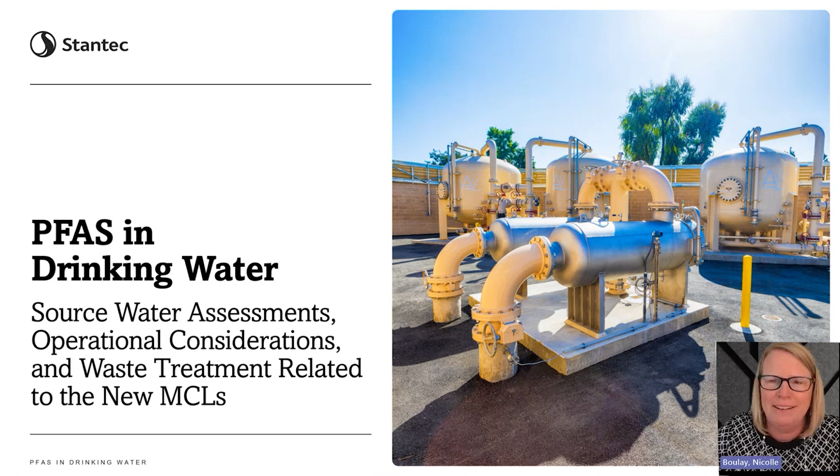So our agenda today is here. I'm going to give a few introductions of our speakers and also a very brief overview of the regulations. I know many of you are familiar with them. Joe Jacangelo is going to talk about source water assessments. We're going to have Tyler talk about operational considerations for PFAS project implementation. And then finally, Liz is going to finish up talking about PFAS treatment residuals management. And then we're going to have about 30 minutes, hopefully, for Q&A. So please go ahead and post those questions as we discuss. Next slide.

Okay, so here are our speakers. I mentioned myself, I'm Nicolle Boulay. I'm our water treatment sector leader. I work out of our Fairfax, Virginia office, and I have a background in water treatment design and construction. Dr. Joe Jacangelo is here, and he's a vice president with Stantec and also our director of research. He works out of our Washington, DC office, and he's worked on multiple PFAS-related projects around the country. Joe also leads our partnership with Johns Hopkins University.

Tyler Hadacek is in our Austin, Texas office, where he's a process engineer. And similar to Joe, he has worked on multiple PFAS-related projects. And recently, he's worked on some ion exchange treatment facilities for Orange County, California. And then Liz Garvey is a process engineer in our Burlington, Massachusetts office. And she has really taken it upon herself to become our company's resource on PFAS and residuals and other waste products.

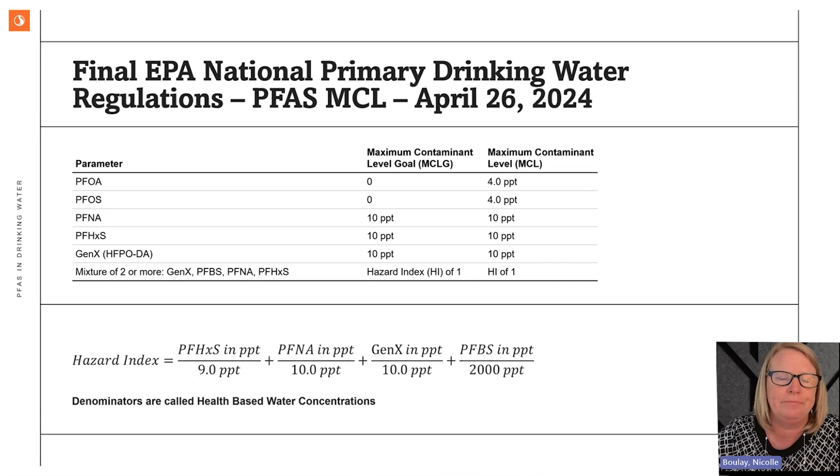So just a couple of key compliance activities that come out of the recently published regulation. All utilities are going to be required to do initial PFAS monitoring at the entry point to the distribution system and take samples quarterly over 12 months. Depending on how the samples come back, you may be eligible for reduced monitoring, and there are some rules around that.

The compliance is based on a running annual average, which Katie Chamberlain was pointing out to me is a little interesting because based on that running annual average, you may have to be in compliance 3 quarters before the compliance period so that the running annual average is actually in compliance. So that could mean that you may have just a little over 4 years to be able to get into compliance. So, not necessarily good news there.

So values below the practical quantification level, or PQL, and there's a PQL for each of those compounds, count as 0 in the RAA calculation. So for example, PFOS has a PQL of 4. So if you have 4 or less, then you get to count that as 0 in your running annual average. And then there's 2 tiers of reduced monitoring available for the PFAS results below these trigger levels. Again, there's trigger levels for each compound. And you may be eligible for reducing your monitoring to either annual or every 3 years, depending on the situation.

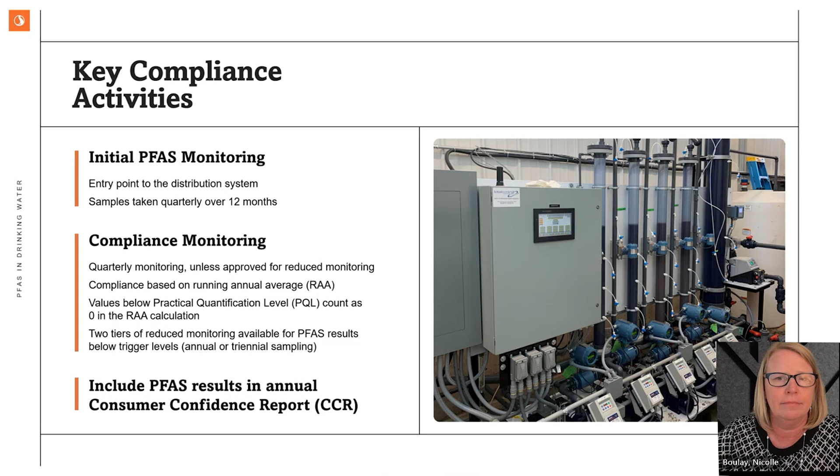So I just wanted to mention the CERCLA rule that went into place in April of this year. So this is the EPA's Comprehensive Environmental Response, Compensation, and Liability Act. And under this act, EPA designated 2 PFAS compounds, PFOA and PFOS, as hazardous substances under CERCLA. Liz is going to get into more detail about this and the implications of it. But essentially, water and wastewater utilities were not exempted from liability.

EPA did make a statement in the middle there. It says EPA will not pursue entities where equitable factors do not support seeking response actions or costs under CERCLA. But I know that our water industry is working to try to change the situation in Congress such that water and wastewater utilities are exempted from liability.

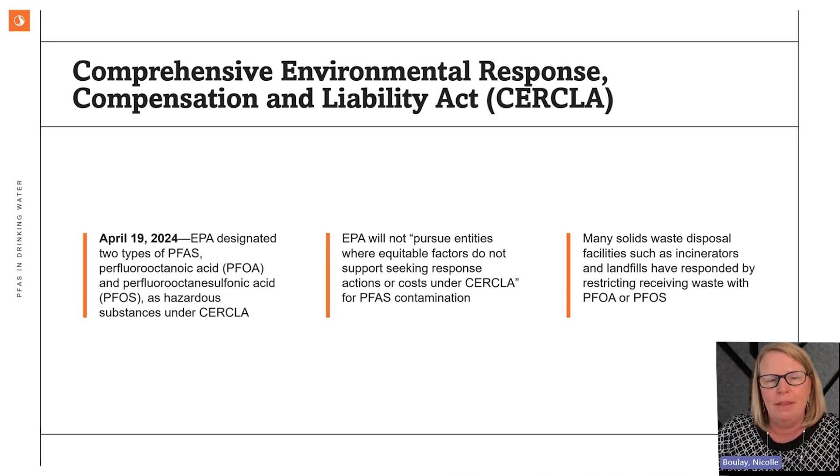And what we're seeing is that some solid waste disposal facilities, such as incinerators and landfills, have responded to this by restricting receiving waste with PFOA and PFOS. At a minimum, they're asking, what are the levels that you have? So again, Liz is going to go into that in more detail. I'm going to turn it over now to Dr. Joe Jacangelo.

Thanks, Nicolle. Good morning, everyone. Today I'm going to talk to you about source water assessments, how to conduct them, and I'll give you some ideas of the projects that we're currently undertaking that deal with assessing source waters from various parts of the country.

Now, when we talk about sources of PFAS in our environment, there are a variety of sources as shown in this slide, but I'm only going to highlight a couple. Some that we're familiar with, and perhaps some that we're not so familiar with. But some that jump out at us are, for example, firefighting and the use of AFFF, which is firefighting foam. Another one are various consumer goods, such as pizza boxes, perfumes, anti-stain on your fabrics, etc.

And then some that we're more familiar with are wastewater and wastewater treatment plants. We know that PFAS are often detected in wastewaters and can actually increase throughout the treatment plant. And biosolids, of course, are a source. And finally, I'll just touch on landfill leachates, which can be a source that enters the wastewater streams. And they're usually not in high volumes, but they can be very concentrated, often in the microgram or even the milligram per liter levels of PFAS can be observed.

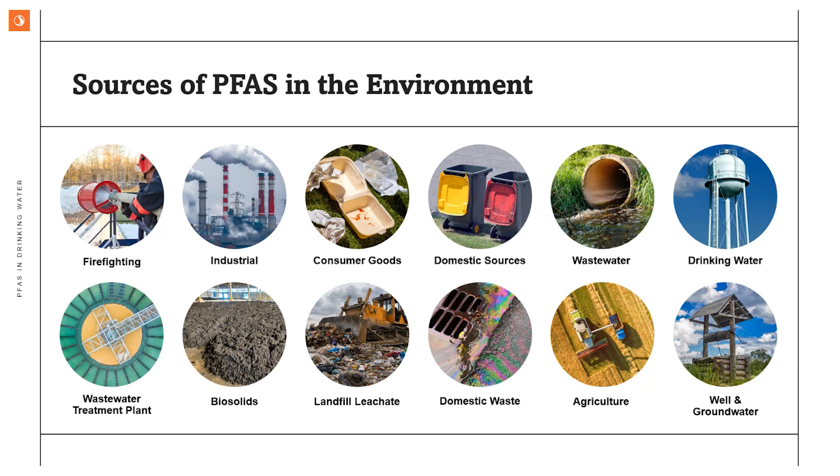Now, when we talk about the detection of PFAS when conducting source water assessments, there are really two approaches. The first approach is to detect the PFAS compounds individually, or to use surrogates of those compounds. And so when we look at the total PFAS that we're examining, there are the surrogates, such as extractable organic fluorine or adsorbable organic fluorine, which I won't go into now. But one surrogate that's more often used is what's called the TOP assay, or total oxidizable precursor assay, which is often useful to get a better view of what the total PFAS concentration may ultimately be.

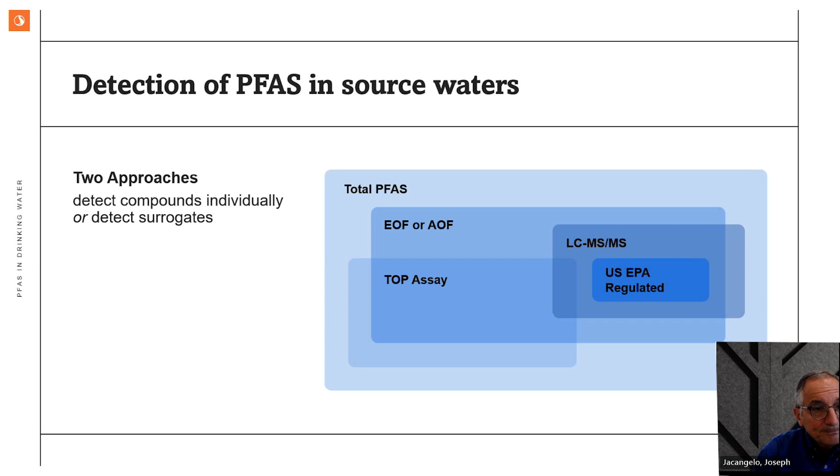Now, when we talk about our individual compounds, those that are regulated, for example, by US EPA, we usually conduct and analyze them through what's called LC tandem mass spectrometry. And I'll talk a little bit about that in the next slide. As I mentioned, PFAS are measured through LC tandem mass spec after extraction through solid phase extraction. And in drinking water, we use method 537.1, which is comprised of 18 compounds, or 533, which is comprised of 24 compounds. But when we look at PFAS in surface water, we employ EPA method 1633. It should be noted that all three of these methods include the regulated compounds that have been recently promulgated by EPA.

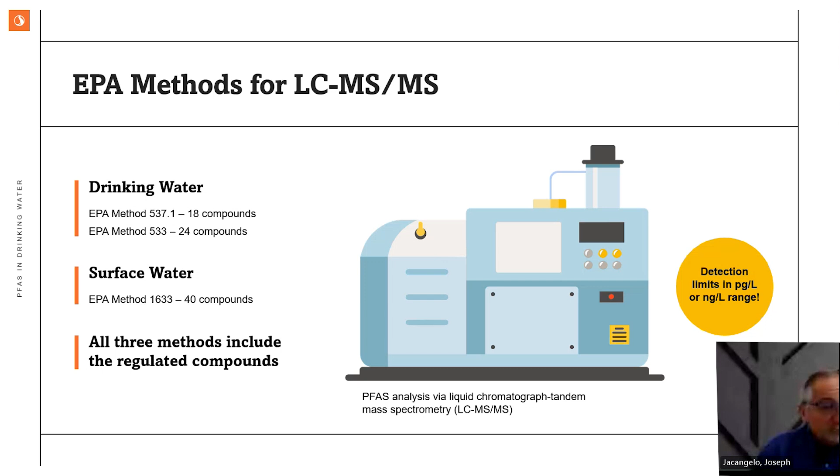When we conduct a source water assessment, the first thing we want to do is to undertake a sampling campaign. And really, the purpose of that is to get a feel for what's in the actual source and capture the potential drivers or potential point sources or other sources of PFAS in the source water. Now, what's really important when conducting a source water assessment is to understand the variability. And one of the main issues associated with variability is seasonality. So more than just taking one sample and saying that's my concentration, we know that PFAS concentrations will actually change over seasons. So it's important to get a larger picture of what your PFAS situation may actually be.

In addition to that, as I mentioned, there are also surrogates. So it's often useful to conduct additional PFAS analysis, such as the TOP assay, but also the greater pool of PFAS too, such as some of the short chain PFAS, which we know are ubiquitous in the environment. And all of this will provide additional support when looking at the source of the potential PFAS within your watershed or in your well water.

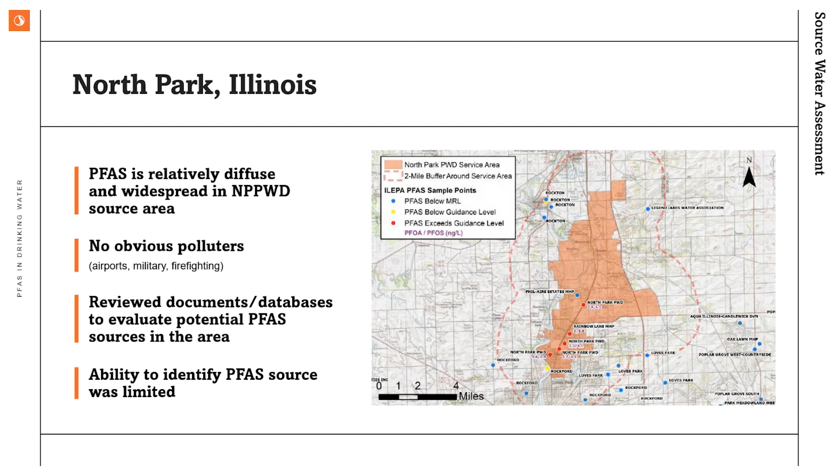The next project I want to talk about is a Water Research Foundation report that has to do with the Potomac River watershed and trying to understand what the PFAS profile within that watershed might look like. Now, the Potomac River watershed is a very large watershed. It spans 4 states and Washington, D.C., and is comprised of over 14,000 square miles of land area.

And in this study, the particular objective was to identify the factors that contribute to or are impacting the presence and variability of PFAS and associated precursor compounds. With that information, the goal was to identify potential sources of PFAS, but also to help inform mitigation strategies should they need to be undertaken.

Now, in this particular study, we looked at previous data, and there was really limited data, but more importantly, the data that was available was really disconnected from time, from the geography, and from the season. So it was prudent to undertake a larger sampling program, which was part of this study.

So in site selection, what we did is we looked at land use data, we looked at PFAS point sources, whether it was landfills, fire training areas, airports, et cetera. And we also used USGS gauge data. We looked at where all the utilities were, both water and wastewater, and also tributary locations, so that we could come up with a comprehensive plan of sampling such that we would capture the watershed in the area around Washington, D.C.

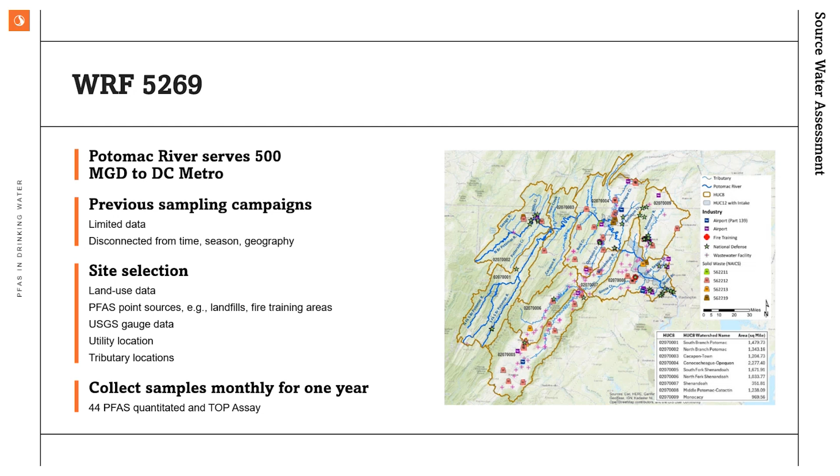And then finally, similar to the other study, this was a watershed study conducted for the South Platte River in Denver, Colorado. There are very similar characteristics in terms of data availability to what we found at the Potomac River watershed, where the data available was essentially disconnected from time, season, and geography. But one of the things we really wanted to do in this study was to understand the PFAS and compare less impacted areas to more urban areas.

And so on the map to the right on this slide, there are some areas such as site 16 and site 17, as well as sites 13, 14, and 15 in the upper left-hand corner. Those are less urban areas and often very rural, whereas the sites to the right of those are much more urban. So this will give us an idea of what may be happening in areas which are not readily impacted, we feel, from PFAS sources, and those that may be impacted to a much greater extent by PFAS.

One interesting thing is the South Platte River is heavily impacted by wastewater effluent, and so we'll also be looking at the potential contribution of wastewater to the overall PFAS loading. And again, this will be sampling 44 different PFAS. We'll be collecting them over a period of 1 year going forward.

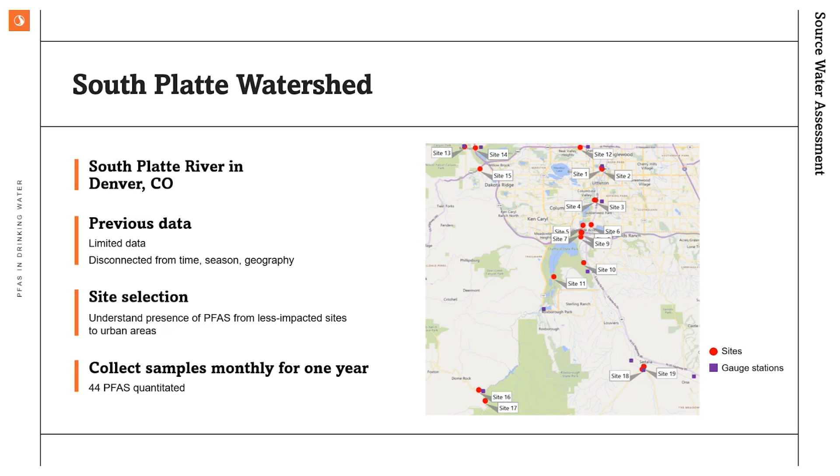So those are 3 examples of water studies that I hope you'll take a look at once they're completed, that may be able to better inform you of how to conduct a source water assessment should you want to do so in the future. With that, I'll turn it over to Tyler, who will speak next.

All right, fantastic. Thank you, Joe. So I'll be continuing on in our discussion here and transitioning into a topic of operational considerations for PFAS treatment implementation.

So first, just to quickly cover some of the main treatment technologies that would come up when you consider treatment for PFAS in drinking water. So these 4 technologies are the ones that have been named best available technologies by the EPA earlier this year with the release of the MCLs as well. And so to talk through them just briefly, granular activated carbon, or GAC, and ion exchange, or IX. Those are 2 media sorptive type processes. You can see in the photo on the left that those are some vessels that would be used in this kind of treatment technology arrangement.

And then the other 2 listed here on the slide, nanofiltration and reverse osmosis, are membrane separation processes, which reject PFAS at the membrane surface, and the clean water passes through. You would have a waste stream then as part of those processes.

So all 4 of these are effective, and as Nicolle had mentioned earlier, we had a previous webinar where we dove a little bit more into treatment and piloting around some of these technologies, so I encourage you to check that out. Again, I'm going to be focusing on some operational considerations for these, and specifically for the sorptive type processes, GAC and ion exchange, as those are the most widely implemented to date. And so I'll be focusing on that.

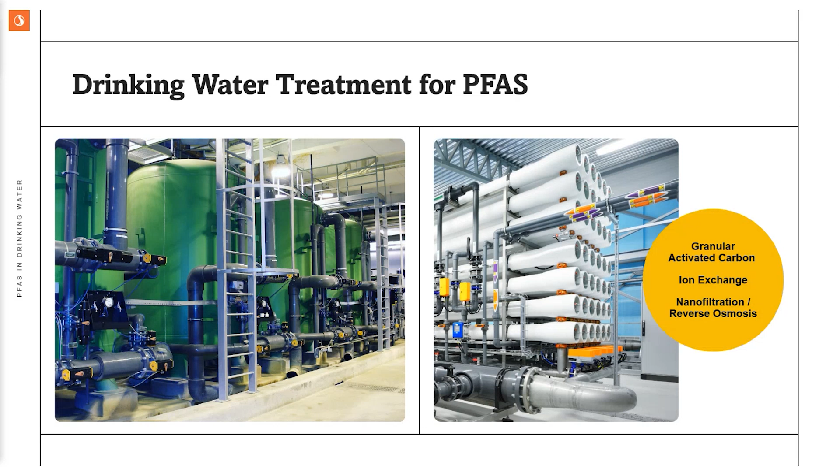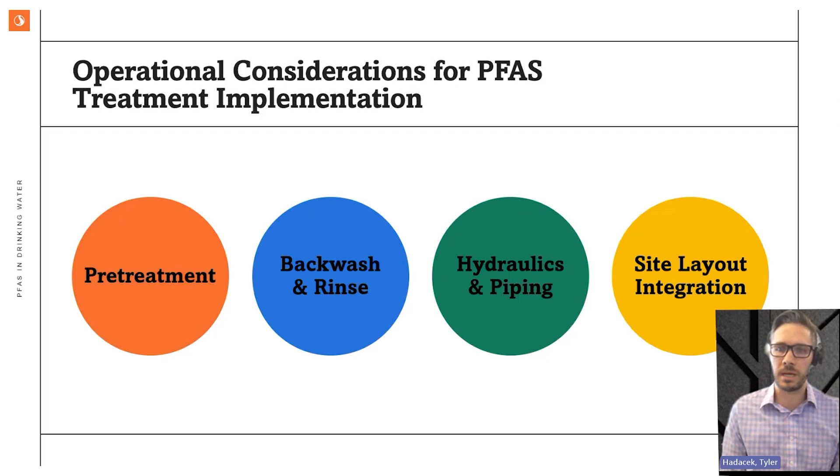All right, so some of the operational consideration topics that I'll talk through, the 4 here shown on the slide: pre-treatment, backwash and rinse, hydraulics and piping, and site layout integration. And I think as you'll see, a thoughtful approach to each of these with operations in mind can really have long-term benefits for your treatment performance and operation.

So starting with pre-treatment, the purpose here for pre-treating ahead of a PFAS removal system, particularly an adsorptive process, is to remove foulants or solids that can impact the performance of the media. And so the figure on the right-hand side of the screen is showing a classic time series from left to right for an adsorptive media process, where the media ends up getting more and more filled up with the PFAS or the given contaminant as the water moves over time from top to bottom. And so over time, you have this mass transfer zone that is going further and further down your bed if your media stays in place.

And so part of the reason we want to do pre-treatment to avoid head loss buildup and backwashing is because then you would mix your media up, you disturb that mass transfer zone, and you lose some of that performance efficiency. And so that's the reason to avoid backwashing and do pre-treatment to remove the solids ahead of time. And then there's other foulants that could also just adhere to the media and cause performance degradation that I'll talk through. And so we'll talk first about what you need to think about removing, and then some considerations around what's the best long-term solutions.

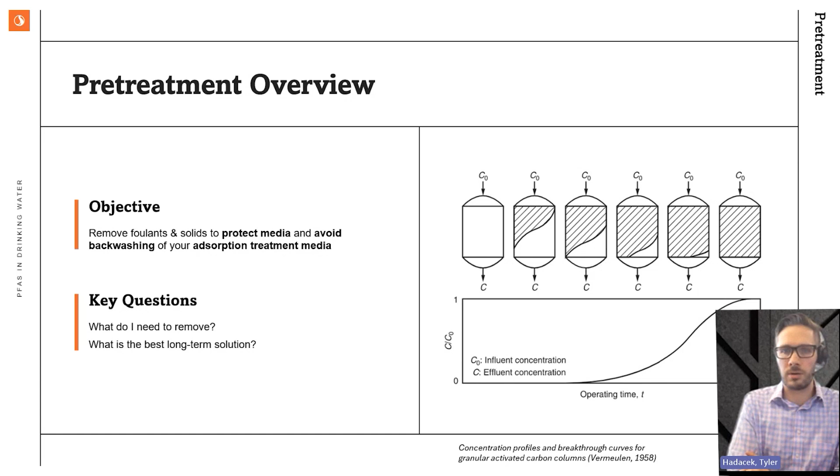So when you think about target compounds, I'll talk in a few different categories. The first is solids. As I mentioned, this will lead to buildup of head loss on the media, and you want to avoid that backwashing requirement. And so removing those solids ahead of time really depends on what solids there are. The point here is there's different size of solids, density of solids, and there's different pre-treatment tools that you have in your toolbox, so to speak, that have some operational advantages. So if you only need to screen down to like 25 microns, you can use auto backwashing strainers that then remove that operational burden of having to replace bags or cartridges, which would be your finer size filters.

So secondly, for inorganics, iron and manganese are known to foul ion exchange or GAC media. You can see the photo on the right-hand side shows some iron fouling of IX resin in one of our pilots in Minnesota. Oxidation filtration is a good go-to pre-treatment step to avoid that from getting to your treatment media for PFAS. The other thing to consider with organics is what other competing compounds you might have, and then co-contaminants. So if you have to remove TDS or hardness, for example, you might want to think about co-treatment, maybe with membranes.

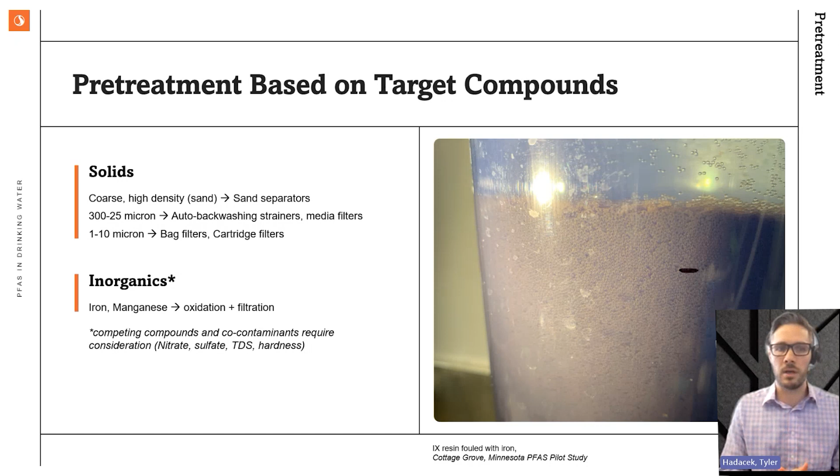Alrighty, so on to the last category of compounds. Organics is a broad term, could be a lot of different things. So for something that we would call natural organic matter, this is something very common that you would see in surface waters that would contribute to biological fouling of your media. And so that's something that you want to be able to pre-treat to avoid the biological fouling that could occur downstream. Total organic carbon would just be a general, bulk term for organic carbon that could be in your water, could be in various forms.

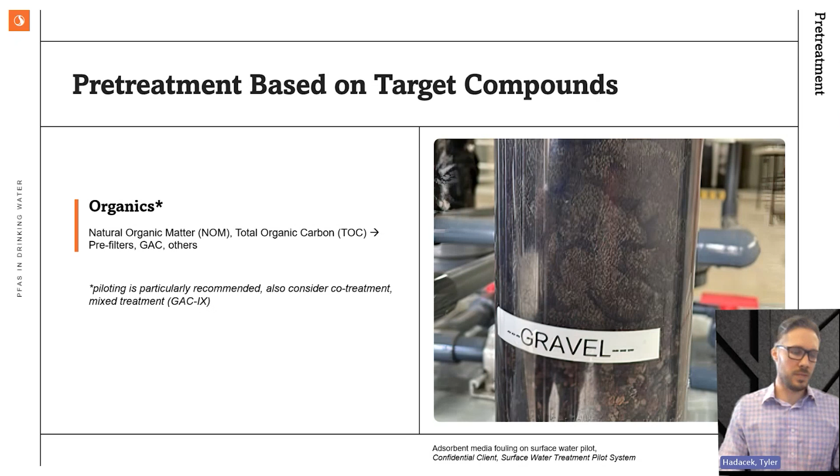And so to understand this, particularly with surface waters more than groundwaters, you're going to see more organics, and piloting is particularly helpful in understanding the impacts to your treatment performance and what are the best pre-treatment alternatives. So you could use just filtration upstream, GAC filtration to knock down your organics with a separate either GAC or IX treatment for PFAS. So a few different things to consider there. Definitely piloting is very helpful in this case.

So getting site specific, I'll give 3 case study examples of what pre-treatment solution might make the most sense given different conditions. So in the far left-hand side, we have the city of Santa Ana's PFAS treatment system with ion exchange. This is on a groundwater source, we did sand separators followed by cartridge filters. And so the cartridge filters are needed for that fine level of solids removal ahead of ion exchange, because ion exchange is a finer media, more susceptible to head loss buildup. And then the sand separators upstream of that allow those cartridge filters to run for longer by not having to remove the sand.

And then the example in the middle is from North Hollywood. This is a much larger facility, a 25 and 50 MGD facility. And here, this is treated with GAC, so not as susceptible to needing that fine level of solids pretreatment. And so we ended up using 25 micron auto backwashing strainers. We didn't have as much solids in the water. They're a little bit coarser. So we're able to use these strainers that are self-cleaning so that the operational burden is lifted as far as exchanging actual filters or bags.

And then on the far right in North Park, Illinois, this is a graph from pilot testing that we did. This is a graph of differential pressure. The point here is not to understand all of the details, but just to see that these are flat line graphs that over time, over months, we're not seeing any differential pressure buildup. And so if we were to implement GAC in this case, we wouldn't need any pretreatment. So this just goes to show you that you really want to think in terms of your specific site and water quality conditions to get the right solution for you.

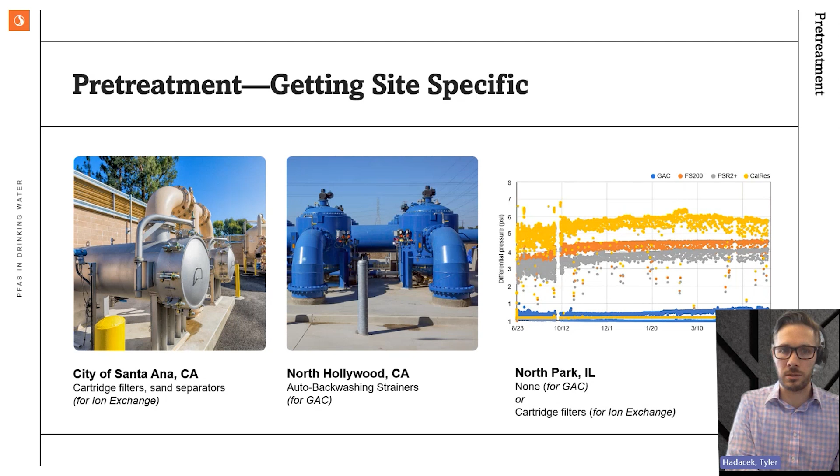Lastly, I'm just going to touch on cartridges versus bag filters for that, again, fine 1 to 10 micron pretreatment. And the point here in the table on the left is really to show the bottom two rows compare what is your life cycle cost if you factor in the labor to do this removal and exchange of the filters versus if you don't consider labor. So for a larger facility, maybe 5, 10 MGD, certainly larger than that, you're going to have to be exchanging a lot of these filters, changing them out once they hit their differential pressure limit. And with larger facilities, that labor burden becomes a lot greater component of that life cycle cost. And so cartridges have a higher dirt holding capacity. They run for longer, there's less frequent exchanging of those filters. And so it really ends up saving you a lot on labor and ultimately a better life cycle cost, even though they cost more upfront.

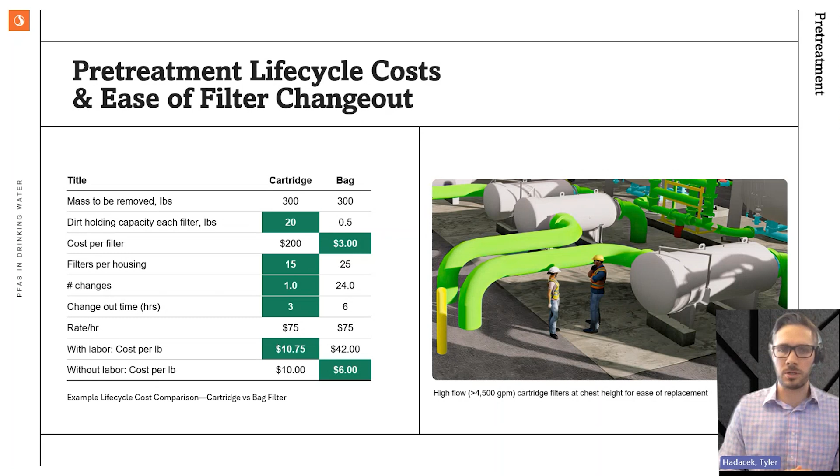Bag filters also have a top entry to the filter vessel housing. And so as shown on the figure on the right, a horizontal oriented cartridge filter allows for an ergonomic, ease of filter change out right there at kind of chest height for the operator versus having to reach over for bags. So another advantage to cartridge filters, especially for large scale installations.

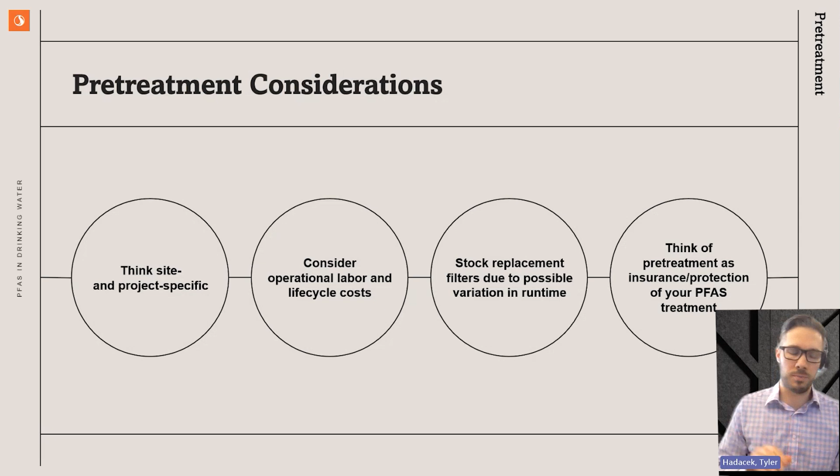So pre-treatment considerations, just kind of wrapping up. Some thoughts here to offer to the group in the industry. Think site and project specific. Consider your operational labor and life cycle costs. Think about stockpiling some replacement filters for those bags or cartridges because once you hit a certain DP, differential pressure, it climbs quickly, and so your runtime can run out after a certain point pretty quickly. You want to have some filters on hand, and then also just thinking philosophically about this pretreatment as insurance and protection of your PFAS removal performance will go a long way in helping you ultimately.

Alrighty, second topic here, backwash and rinse. I'll give a quick overview of where this comes into play for GAC and IX. So on the right-hand side of the screen, you see for GAC media, you're going to need to backwash the media when it comes on site, whenever you're exchanging the media or for your first fill. This is to remove fines.

You'll have some other water quality issues, higher pH, potentially arsenic. So you're going to want to wash that media when it comes on site, backwash it, remove the fines, stratify the bed, and then you'll forward rinse both during startup, but also during short-term down periods to avoid biological growth when you're offline instead of letting the water sit stagnant.

For ion exchange, you're only going to do a forward rinse for the same reasons, rinsing it when it comes on site and also for short-term downtime. It's a much lighter, very low specific gravity media, so you can't really backwash it. You don't want to. You'll lose a lot of that resin going out your backwash if you tried to.

So some key questions to consider here. The water quality that's coming off of your initial rinsing or backwashing is something you need to think about as far as how much rinsing or washing you need to do to get rid of the fines and the potential arsenic in GAC, which is pretty well known in the industry. More often than not, the GAC, both coal-based and coconut, can have arsenic present.

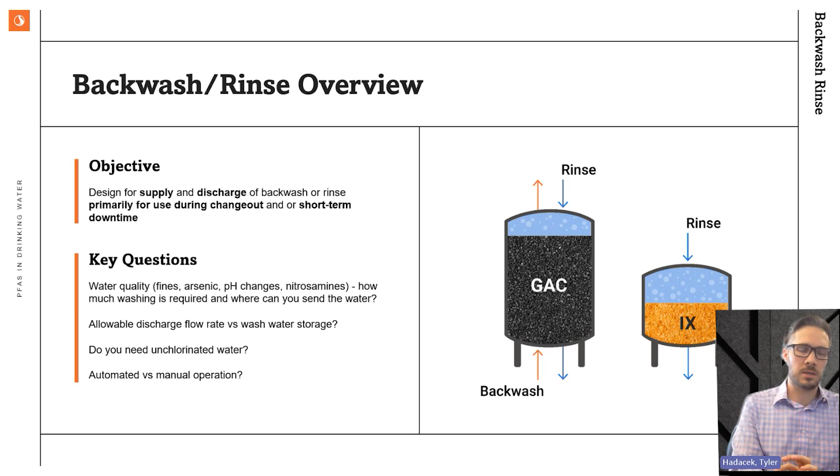So some lessons learned from rinsing ion exchange at our Orange County sites that were mentioned earlier. One, we were using well water to achieve that non-chlorinated source. And the hydraulic condition was very different, whether we were discharging the rinse water to the atmosphere to waste, in this case going to the storm sewer, versus going into a 90 PSI distribution system. Those hydraulic conditions are very different and had to be accounted for. A VFD really helped in this case.

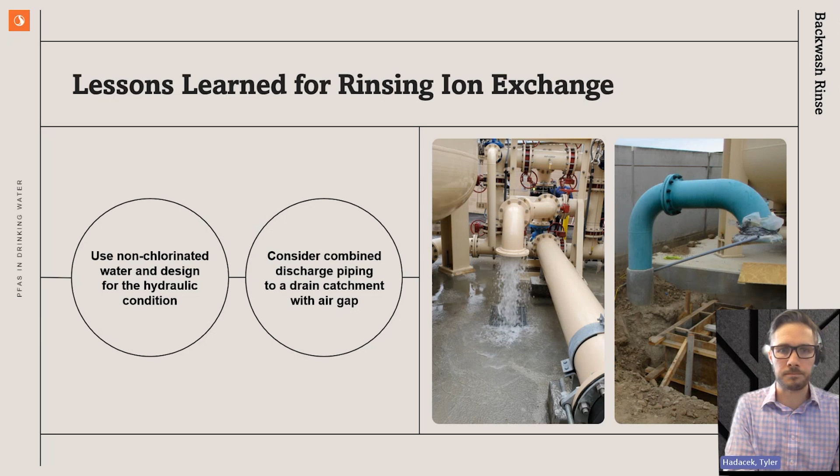All right, hydraulics and piping. So the first thing to mention on this topic when it comes to putting a PFAS treatment system on an existing water source is you're adding head loss. And so there's a hydraulic condition change, and in order to keep the same production, you need to overcome that with a booster pump or by upgrading whatever upstream pumping process is there. So that's one thing to consider, just how you do that and if you need to.

The second thing, and maybe a little bit more nuanced and not as obvious, is thinking about startup. What do you need for startup? Where do you need to discharge, before or after treatment, things like that. And I'll go into that in a minute.

So the first thing to mention as far as key questions on a groundwater system, whether you rehab the well pump or booster pump, the short answer that we've found is oftentimes if you have the space for a booster pump, it can be half the cost of rehabilitating the well pump, because that requires specialty equipment to pull the well and other things that increase your cost.

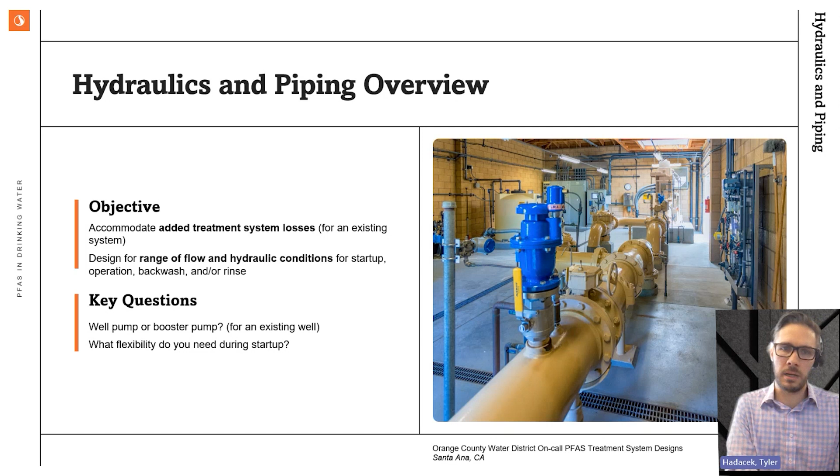And then lastly, really thorough planning for pre-commissioning to get everything ready on your treatment system, all your rotating equipment, all of that ahead of your disinfection and then your media fill. And the reason for that is once you get that media in there, it is much harder to disinfect again. You have to use a peroxide solution, for instance, and it becomes more complicated. So you want to be able to continuously operate after you get that media in. Less start and stop is better so that you avoid bacterial contamination. So that's just really a startup planning consideration that's important.

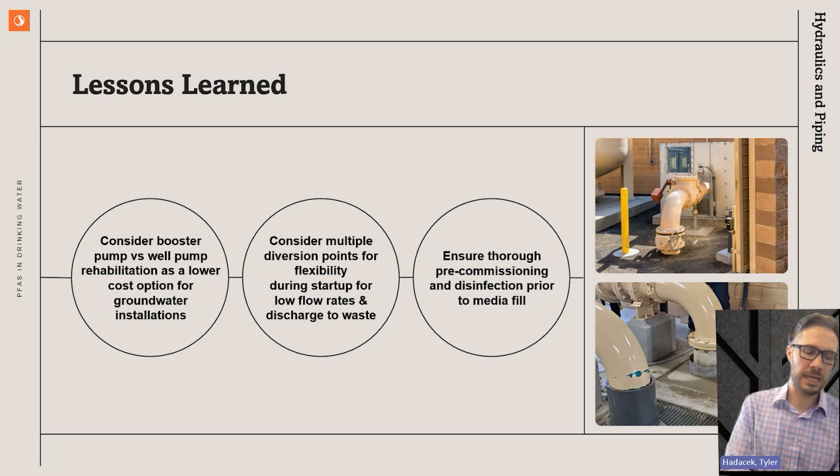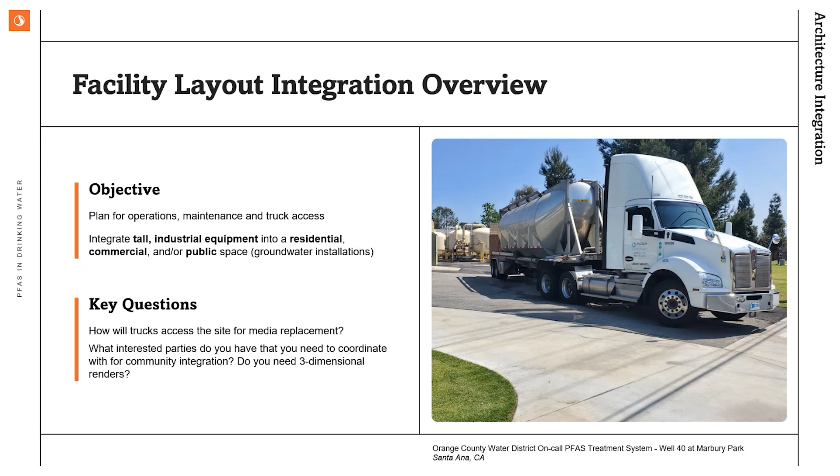Lastly, facility layout integration. Couple things operationally. Think about the truck access to be able to exchange the media for a sorptive process. For membranes, you need to think about things like the space to be able to pull in and out those membranes and other things of that nature. But nevertheless, for this, you want to think about your truck access, and then also if you're in a residential or commercial area, which are typical of groundwater installations, you want to think about how your operational access needs may coincide or work together with the impacts on your layout to the neighboring entities, commercial entities, residential entities, and that sort of thing. So I'll talk through a couple of things on this topic.

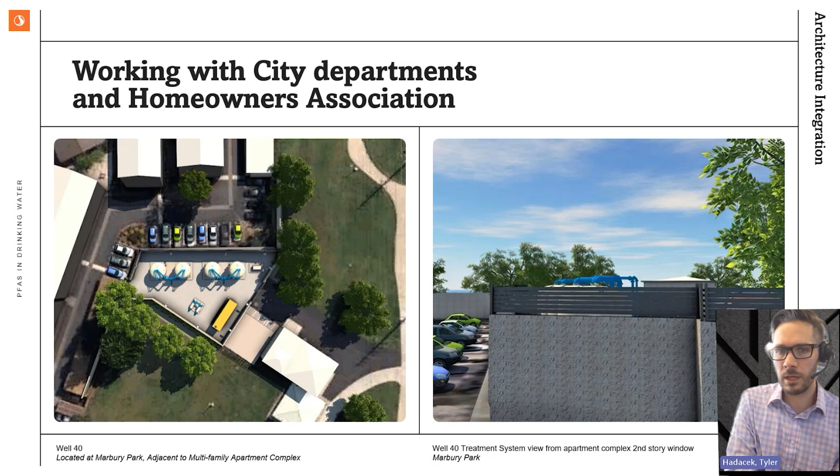The second rendering on the right just shows that 3D renders can be really helpful in planning for visual screening, so that residential neighbors, for example, don't have to look at an industrial treatment site out their back window.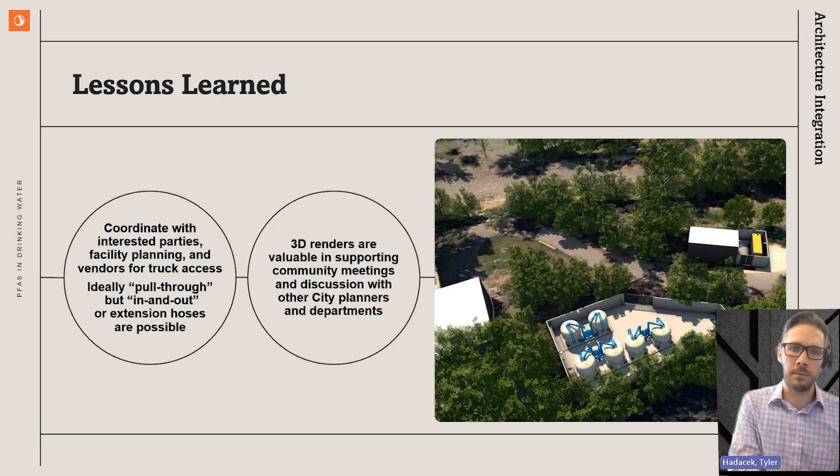And then lastly, just the 3D renders can be really helpful in community meetings and planning out your site with other city planners and departments, particularly for groundwater installations that are in the community. So to wrap up, pre-treatment and co-treatment should be carefully considered for the best long-term operable solution.

Ancillary project components have and can have a significant impact on startup operations, performance and costs. So backwashing and rinsing, for example, and your piping for startup need to be thought through well in advance.

And then lastly, the MCLs came out recently from EPA just this year, but a lot of states in certain parts of the country have had state regulations. There's a lot of implementation that's already been done and some lessons learned, examples of which I've shared in this presentation, but there's others out there that we've been involved with as well.

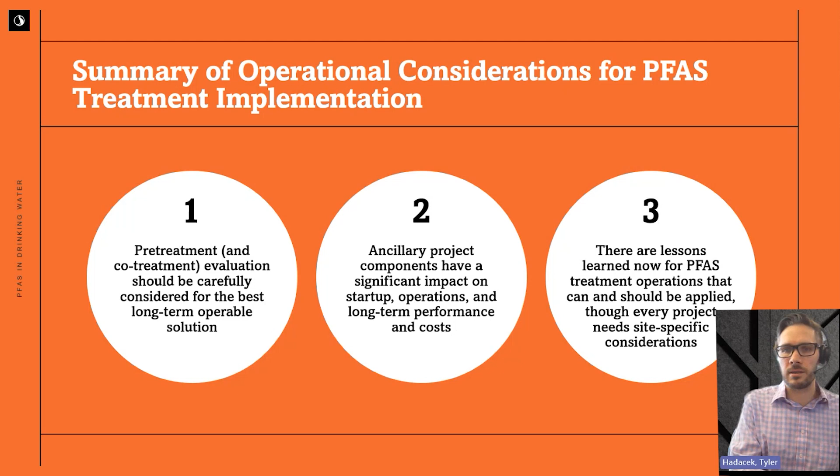And so all these lessons learned are really valuable as more and more utilities are thinking about their treatment facility implementation. So keep that in mind, as well as the fact that site-specific considerations are always going to be needed because every project's different. So with that, I will hand it over to Liz Garvey.

All right, great. Thanks very much, Tyler. So now we will talk about the management of PFAS residuals, including disposal options and optimization strategies. We'll also cover associated liabilities with these options, ways to protect your own utilities, as well as other important considerations. Next slide.

So starting off, we're going to do an overview of CERCLA and RCRA. I know Nicolle earlier spoke a little bit about CERCLA and how it applies to PFAS residuals. We're going to dive in a bit more specifically here. But to start off, these two laws are very similar in terms of how the regulations are actually carried out, but there are some key differences between these two laws.

CERCLA is the Comprehensive Environmental Response, Compensation, and Liability Act. This addresses hazardous waste in the environment from unknown sources or sources from abandoned facilities. Under CERCLA, EPA can intervene in managing hazardous materials contamination released to the environment. It also helps EPA to find potentially responsible parties, often referred to as PRPs, and requires them to perform cleanup actions or pay for those cleanup actions.

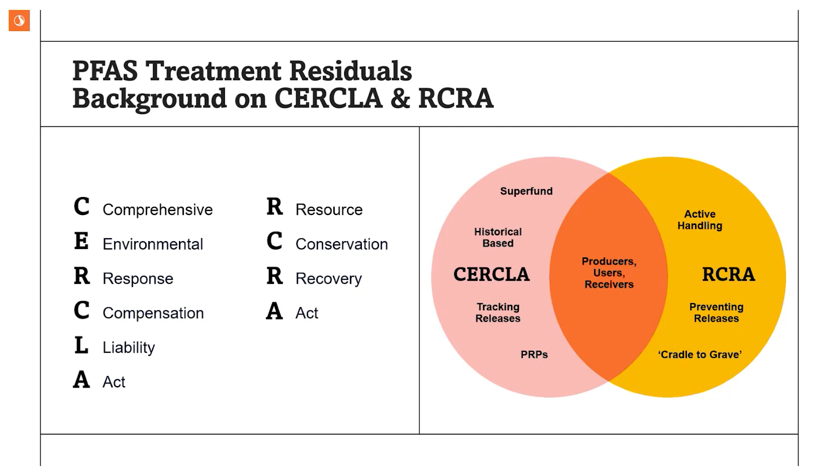So starting with CERCLA and how it pertains to PFAS compounds. In April of this year, as Nicolle mentioned, PFOA and PFOS were deemed hazardous compounds under CERCLA. This means that when 1 pound or more in a 24-hour period is released, that is a reportable incident. For most water treatment facilities this is not going to be an issue, but it is likely that this volume will decrease over time, so the likelihood of more facilities needing to report under CERCLA will increase as the years go on.

The objective of designating these compounds as hazardous is really to have polluters pay, so the actual creators of these hazardous compounds are responsible for the release into our environment. Some key features include EPA's enforcement discretion policy, where they have said that they will not be going after farms with PFAS biosolids, municipal landfills and airports, community water systems and MS4s, as well as local fire departments.

But the policy does not directly protect others from suing these groups. And this rolls into the right of action for PRPs, those potentially responsible parties. This right of action allows PRPs to sue other entities, such as water and wastewater municipalities, to spread out that liability.

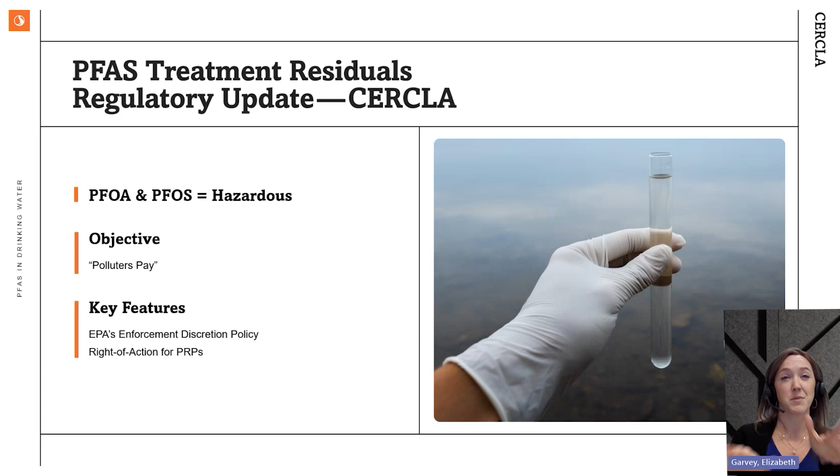Next slide, Tyler. So in terms of CERCLA, for the next steps for CERCLA, I should say, the liability protections that EPA has brought up in response to the concerns about these designations include the PRP settlement requirements. So EPA does plan to seek requirements that major PRPs waive the right to sue other parties, such as a water utility, under the discretion policy when these PRPs make settlements with EPA.

Another way to address the concerns, there's a proposed act in place right now called the Water Systems PFAS Liability Act. What this act essentially would do is provide protections from financial liability under CERCLA for water and wastewater systems that comply with regulations for PFAS treatment and disposal. This is a bipartisan bill. It was brought to Senate in May of 2023 and to the House in April of this year. Again, it is just a proposed law at this point, but it is gaining a significant amount of traction with more House representatives and Senate co-sponsors.

Another item to address the concerns with CERCLA include PRPs needing to implement controls. So EPA has stated that they may begin requiring actions from PRPs, such as in-kind services for institutional controls to address their hazardous waste output, as well as continued required monitoring. Next slide.

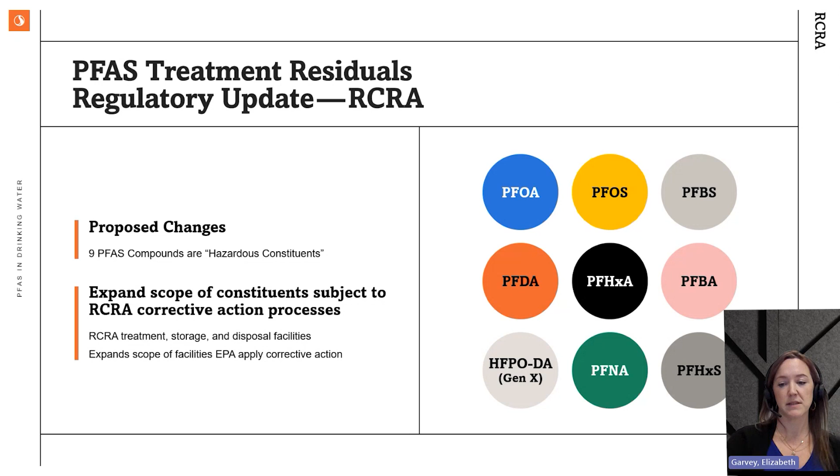So now we'll talk about the types of PFAS residuals from water treatment plants. So when you're treating for PFAS, you're really going to be seeing it in every process, every step of the way through your facility. Starting with pre-treatment residuals. So we're often seeing the residuals in the phases of flocculation and sedimentation basins. If you're using RO, so reverse osmosis, for PFAS removal in your water, you will almost definitively have a very high concentrated stream from your RO brine with PFAS concentration, as well as spent media. So that's from GAC, ion exchange, Fluorosorb, whatever adsorptive media you're using at your facility, if that's applicable for you.

This is now going to be a PFAS-laden residual, as well as system commissioning and O&M. So this can be from backwash waste, depending on where you're sourcing your backwash from, sample and analyzer water, things like that.

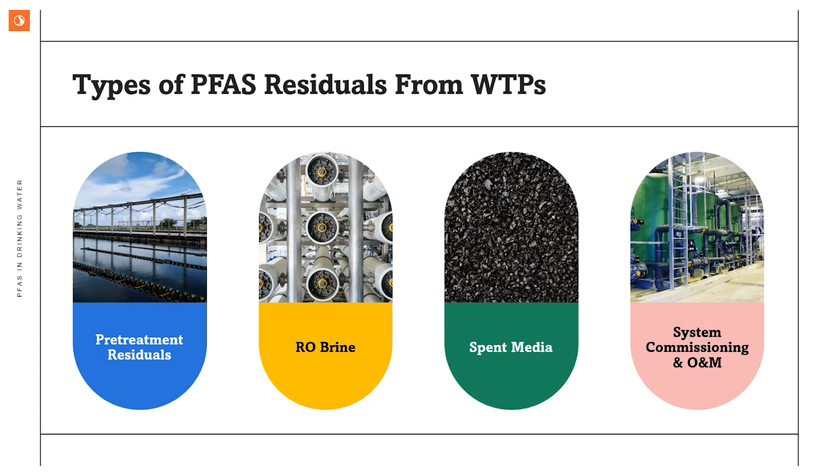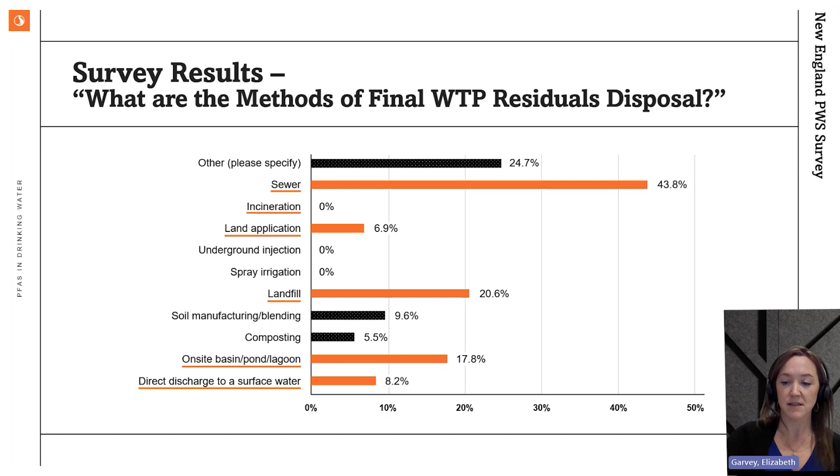And then on the next slide, we'll talk about the forecasting of what we saw back in 2018 in comparison to what we're seeing now. So we're seeing a significant downtick in the use of sending residuals to the sewer. Again, with what we talked about previously with the potential liabilities associated with CERCLA and RCRA, we are seeing many of these wastewater utilities not wanting to take on the potential liability risk associated with accepting additional PFAS compounds.

So significant downtick there. We are seeing an increase in incineration. Back in 2018, not as necessary of a process, at least as it was understood at the time. But now, with the understanding that incineration at high enough temperatures does actually do at least a partial breakdown of many of these PFAS compounds, we're seeing a significant increase there.

Land application, as many of you probably know, has gone down. In the New England area, we were sending most of our residuals to Maine as well as Canada. Maine now has laws in place, as of August of 2022, preventing folks from land applying at farms and things like that. Used to be looked at as beneficial reuse, but if you do have that PFAS-laden waste, it is no longer accepted. Canada has also placed temporary bans for all of the US and concentration limits for their land applied solids.

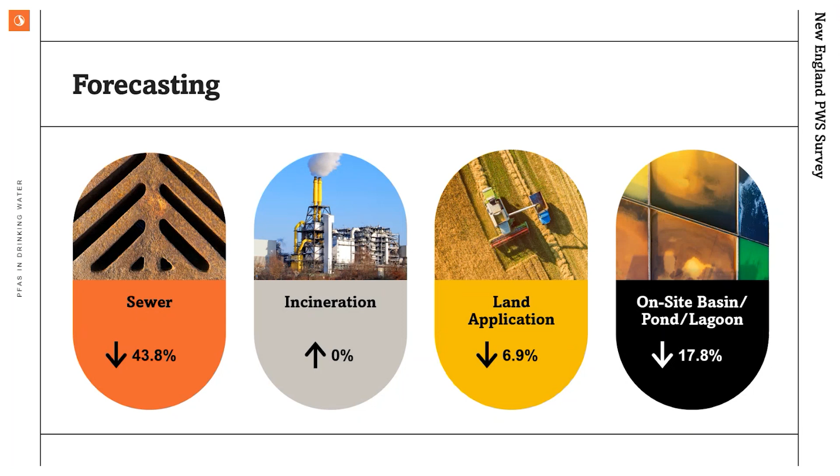And then on the next slide, we'll talk about the sort of dual trend that we're seeing with landfills. So we're seeing a decrease in non-hazardous waste landfill application. Again, these facilities, similar to wastewater facilities, don't want to take on the potential liability of accepting these PFAS compounds. So we're seeing a decrease there, but an increase with hazardous waste landfill application.

Again, as we talked about, these would be RCRA certified facilities, right? And so they are complying with the regulations under the EPA. It is significantly more expensive to send your waste to a hazardous waste landfill versus a non-hazardous waste landfill, but it is becoming a more feasible option for folks now.

We're seeing a decrease in discharge to surface water as well, again with that potential liability association, and then an increase in destructive technologies. So back in 2018, we didn't even have destructive technologies as an option for one of the answers as to where you're sending your residuals, because it just wasn't understood that this was going to be a necessary means. But with some significant technology development and studies, we have seen an increase there.

The Stantec Institute does a significant amount of studies and stays up to date on the specific technologies that are not only the most successful but feasible. And we try to keep everybody up to date with those feasible methods for use at your facilities or where to send your residuals for destruction.

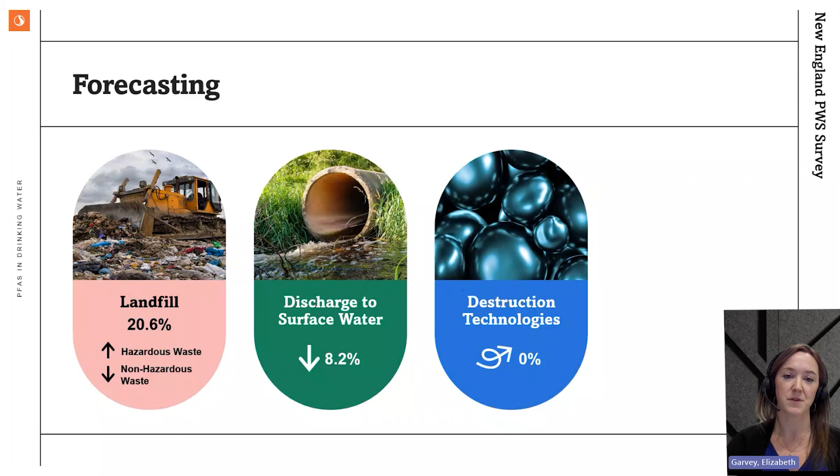Then next slide, looking at the hazardous waste landfill options throughout the U.S. So we spoke with Clean Harbors. Around the U.S., they have 5 hazardous waste closed loop landfills. These are facilities that are, and a key note here, accepting of PFAS-laden waste. You will sometimes find facilities that designate themselves as hazardous, but have not yet agreed to actually accepting PFAS compounds. So it's important to make sure of that before you partner with a facility.

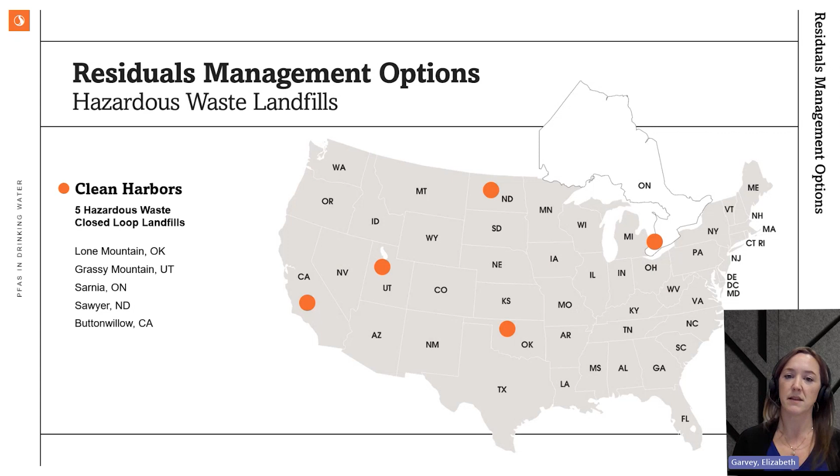This closed loop item simply means that they manage their own leachate. So again, that helps with the liability association because they're not then putting it back into the environment. They are actually handling that PFAS-laden leachate.

Then on to the next slide, we'll look at the hazardous waste incinerators around the country and in Canada. So for this, again, we spoke with Clean Harbors as well as Veolia. The map here shows the different locations of these facilities. Again, all of these are facilities that are currently accepting of PFAS. Really important to make sure you're checking with these facilities before you decide to start working with them.

These are all RCRA permitted facilities, at least those facilities that are in the US. Canada has its own designation for that. And then all of these facilities have a 99.9999% DRE, which is the destruction and removal efficiency.

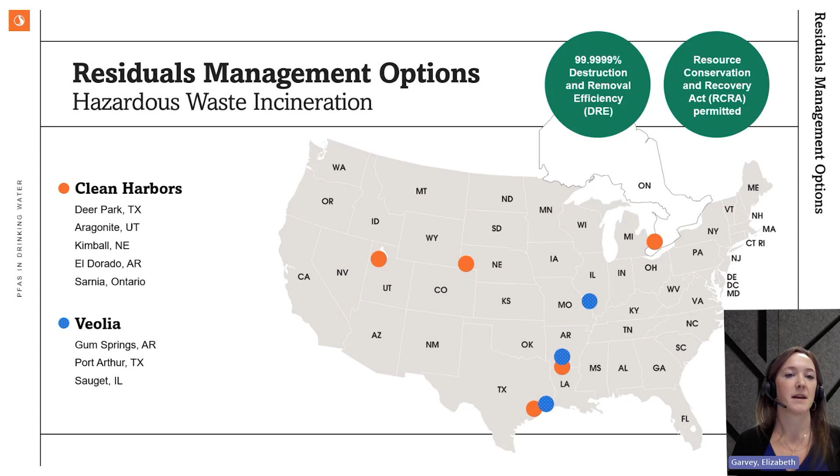On the next slide, we'll look at landfills versus incineration and how to compare these two options. So for hazardous waste landfills, the acceptance may vary. Typically, we're seeing concentrations of less than 1 part per million in your residuals being accepted at hazardous waste landfills. The cost can significantly vary with concentration, but we are seeing about a 40% cost savings in comparison to sending waste to your hazardous waste incinerators.

When you send your waste to a hazardous waste landfill, you do receive a certificate of disposal, but this is unfortunately still associated with a significant potential for liability risk. Hazardous waste incinerators, on the other hand, are accepting of all PFAS concentrations, and the costs can vary more, not so much with concentration, more so with the specific compounds that you are sending there.

So for example, we've seen the costs increasing when you send AFFF, which as Joe mentioned earlier, is typically associated with firefighting foam. When you send your waste to a hazardous waste incinerator, you do receive a certificate of destruction, and that certificate of destruction is associated with a reduced liability for your facility.

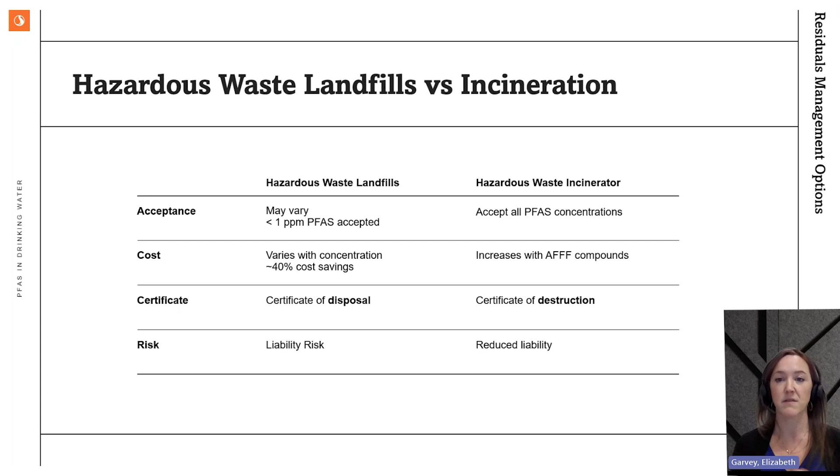On the next slide, we'll talk about an option with GAC media. As Tyler went over, this is one of the most successful methods for removing PFAS in water. And the nice benefit of using GAC is that you can actually have a reactivation process. You're not needing to dump all of that media necessarily every time it gets spent. But we do often hear folks using regeneration and reactivation synonymously. And I do want to just clarify there, these two processes are different.

So GAC regeneration is typically done at lower temperatures in comparison to reactivation. It removes some of the adsorbed contaminants on the media. It can be performed in situ with hot gas, which is convenient, but the temperatures are typically too low to actually destroy most PFAS compounds.

Reactivation, on the other hand, is typically done at much higher temperatures. It does remove and destroy adsorbed contaminants on the media. It's performed at specialized facilities in NSF 61 kilns, so compliant with drinking water. And it also has the benefit of returning carbon to a virgin-like state. And we have frequently been seeing about a 20 to 30% cost savings when you're reactivating your media versus replacing with fully virgin carbon.

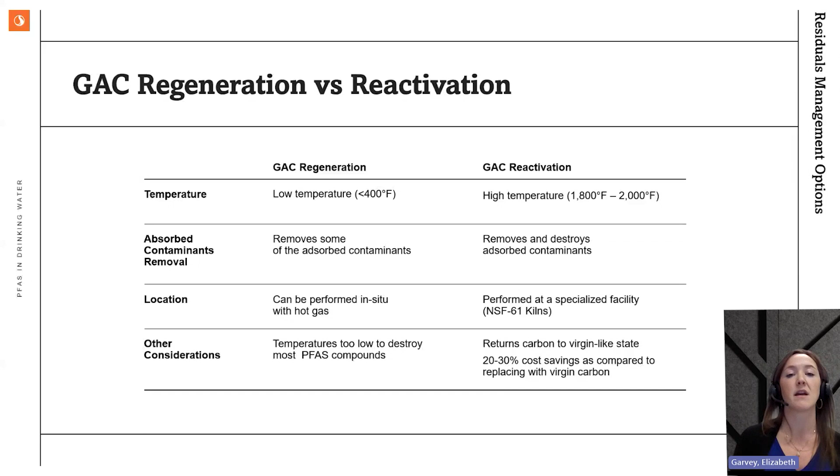On the next slide, we'll look at some of the facilities throughout the U.S. after speaking with both Calgon and NORIT about their facilities that are performing this reactivation. So Calgon has facilities in Arizona, New York, Ohio, and Pennsylvania, and then NORIT does have that facility in Oklahoma.

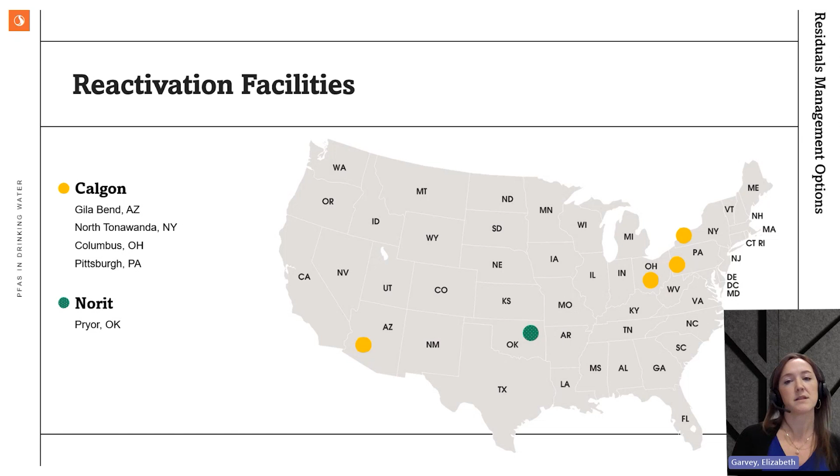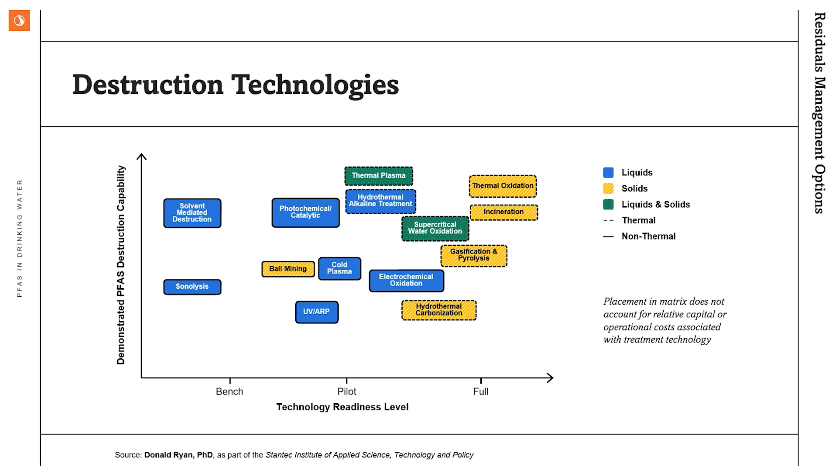Next slide, thank you, Tyler. If you decide to perform on-site destruction, many of the technologies I just talked to are occurring at specialized facilities, but we are seeing more and more options popping up for actual on-site destruction. So some important considerations here include mobilization fees and permitting. Many of these current on-site destruction technologies are just being piloted at the moment.

They're either coming at very low cost to utilities or free, because it is a mutually beneficial relationship for these companies to be getting the data of the destruction efficiency, things like that. But make sure to advocate for yourself and understand what the mobilization fees are going to be, what the cost of treatment will be, permitting as well. And we've been working closely with some of these companies to make sure that we have a pretty solid grasp on that information to be able to best care for the water utility, and that it's not a major sticker shock when we actually go to implement this at full scale.

It's also important to consider the mass balance of these technologies. We've worked with some professors at the University of Massachusetts in the water department there who focus on the effectiveness of destruction technologies. And what they have discovered is that many technologies, as of right now, are missing about 20% fluorine when they do out their mass balance, which essentially means that there is a lack of actual destruction.

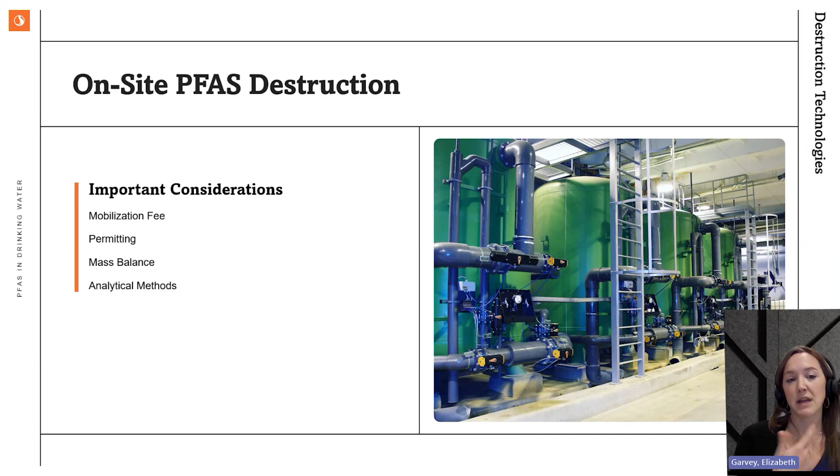And so we've also been talking with our local permitting agencies about what that means, what true goals are. That will most likely vary from state to state. So again, keeping close contact with your local regulators is important.

Next slide, Tyler. So now for liquid stream destruction, this depends on the actual concentration of PFAS. So if you choose to do liquid stream destruction at your facility, it is very beneficial to do some form of pre-concentration before you actually conduct your destruction. So this can be done through liquid solid separators, foam fractionation, which is gaining more traction, as well as membrane pre-concentration, which typically is in the form of either NF or mostly RO membranes, and you will ultimately see improved degradation there. Important note as well, the water matrix constituents, the background organics will compete with PFAS and use up oxidants, so removing those preemptively is important as well.

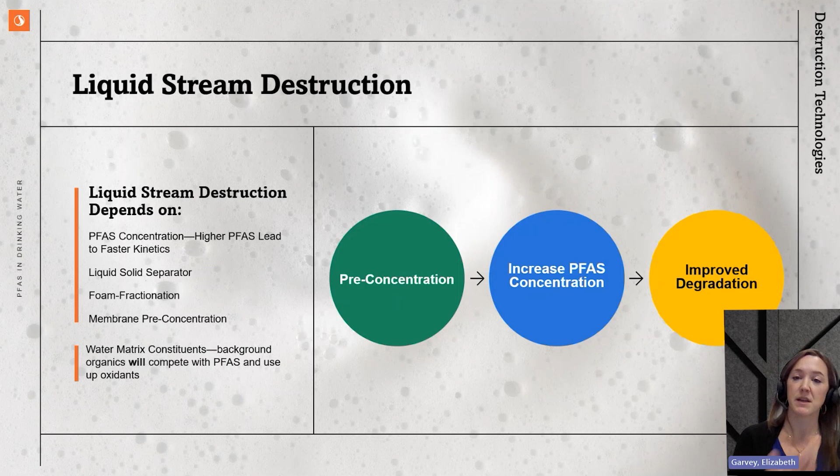And then to summarize, increasing cost considerations when we're looking at life cycle costs and analysis of our PFAS treatment, you do want to make sure that you're not skipping over or underestimating the feasible destruction or disposal options that you need to conduct for your facility, because this is anticipated to have significant cost implications for water utilities. But to help with that, we're encouraging folks to get in line for funding. So that's SRF funding, state revolving funding, as well as grant funding. I know that Stantec does have our funding services group available, who we frequently use a lot more than we used to for getting our clients in line with this funding.

As well as the benefits for concentrating and reducing your overall waste. When you can concentrate, whether you're destructing on site or sending to a waste facility, that lower volume or just faster kinetics of your destruction will help to ultimately reduce cost. And then again, future destruction, keeping an eye out for those destruction technologies and development there, as well as efficiencies that will be helpful to you.